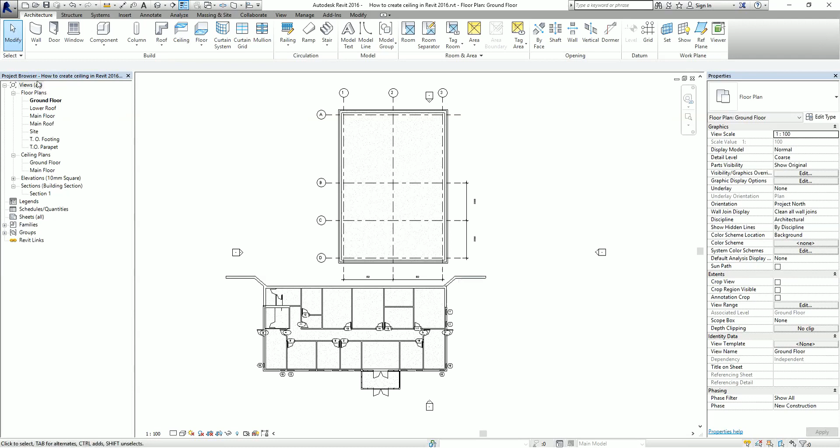So for the first part of the exercise, I'm going to show you how to add a ceiling and modify the ceiling properties. Since we are going to create a ceiling, from the project browser I'm going to change my view to the ceiling plan, because you'll not be able to see the ceiling on your floor plans. That's why I'm going to select the ground floor under my ceiling plans. So I just open this, and this is where I'm going to place my ceiling.

Okay, so to start creating a ceiling, from the architecture tab, build panel, you will see here ceiling. It creates a ceiling at a specified distance above the level in which it resides. So I select the ceiling here, and then you will see the modify place ceiling contextual tab.

So we have two ways of creating a ceiling in Revit. It can be automatic ceiling, wherein it creates a ceiling at a specified distance above the level in which it resides. The other one is sketch ceiling, which I'm going to do later on. So for the first part, I'm going to use automatic ceiling, and I'm just going to make sure that I'm using the default ceiling here, the GWB on Metal Stud.

And then on my properties, let's say for example, I'm going to change the height offset from level to 2400, 2400 from the ground floor. So that will be the height of my ceiling.

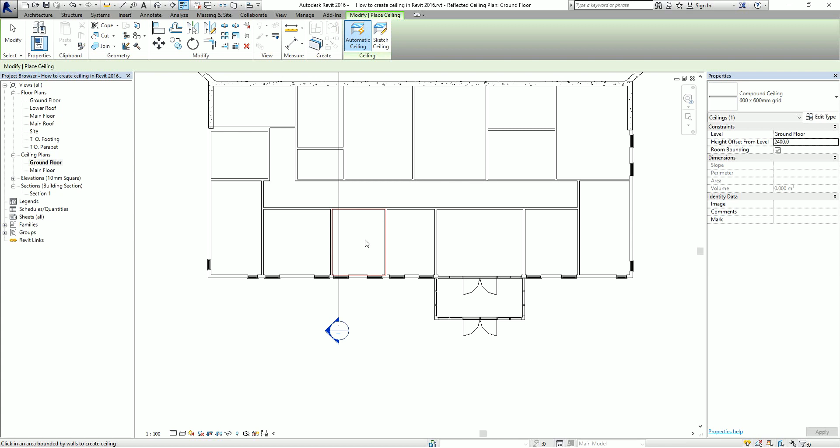The first ceiling that I created is not visible in our current view because the type does not have a surface pattern. So this time, I'm using the 600 by 600 mm grid ceiling, and I'm going to place it here. I'm not going to place ceilings on all of this floor, so I just select part. You just need to get the idea of how to create the ceiling. So I'm going to pick here. There you go, there's the ceiling. And then I select modify.

Okay, so you can easily select now the grid for you to be able to select the ceiling. As you can see, even though I selected the grid, still I selected the ceiling. And in case you want to modify the shape of your ceiling, just like your floor, you can just select your ceiling and then you will see your edit boundary.

In case you want to edit the boundary of your ceiling, you can just recreate it. Okay, you can click that, you can drag up to here, so it's up to you. Okay, but for this one, I'm just going to cancel this. Yes. All right, so that's my ceiling.

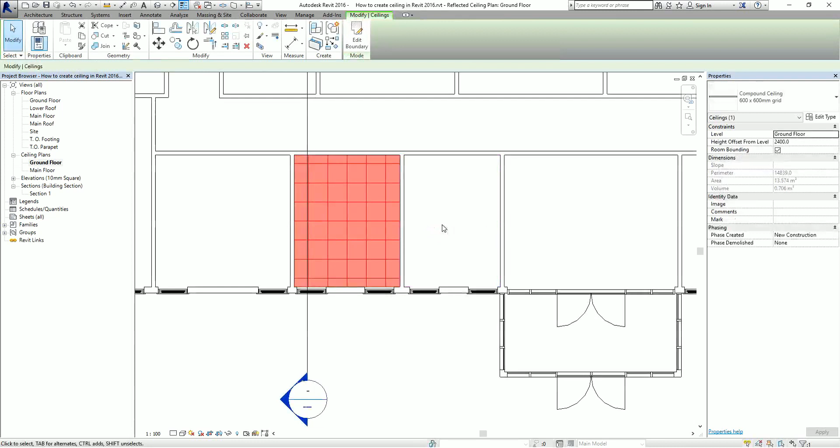So another thing is that you can modify the grid of your ceiling. Okay, so you can edit the ceiling grids. Like for example, if you want to start the 600 by 600 here, I can use the align command here from the modify tab. So I'm going to select the align tool. Excuse me. Okay, so align.

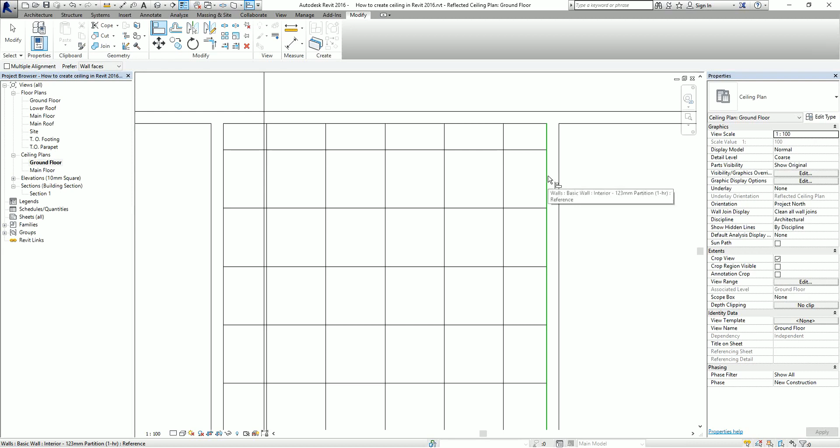All right, then I'm going to select the vertical part of this wall here. And then I'm going to select the grid that I want to align there. There you go. And after that, I select this. And then I'm going to click this. All right. So there's your 600 by 600. So you can edit your ceiling grids.

So aside from using the align tool, you can also use the move command in editing your ceiling grid. I'm going to terminate the tool. Okay, I'm going to show you. So I'm going to select the grid. And then after that, there's the move command. Okay, so I'm going to click this endpoint. And then I'm going to snap at the midpoint. There you go. Click. All right.

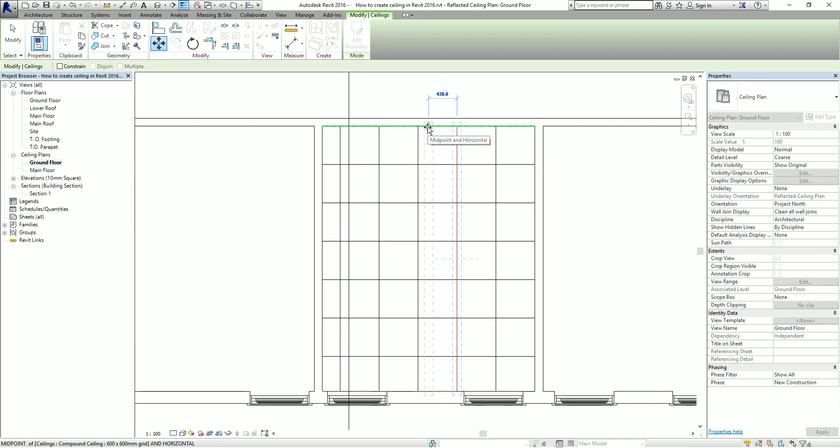So you can use the align command. You can use the move command to edit your ceiling grids. You can also just simply select the grid and then drag it. Okay, you can also do that. So I select and then see, I just drag. Right? I click and I just drag. Click and you can just drag it manually.

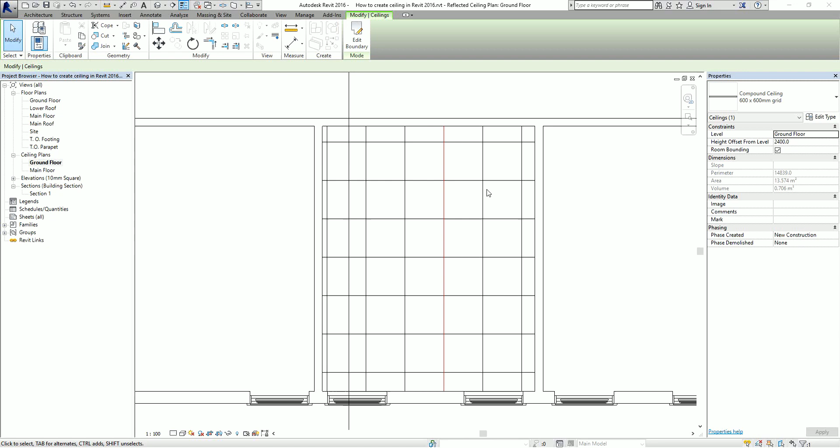Okay, next. What I'm going to do is, I'm going to show you how to sketch your ceiling. Okay, so for the first two ceilings that I created, I used automatic ceiling. Okay, so this time, I'm going to use sketch ceiling. Alright? Okay, so I'm going to create the ceiling here. So again, I'm going to select architecture. And then there's the ceiling. Okay, and then this time, I'm going to select sketch ceiling.

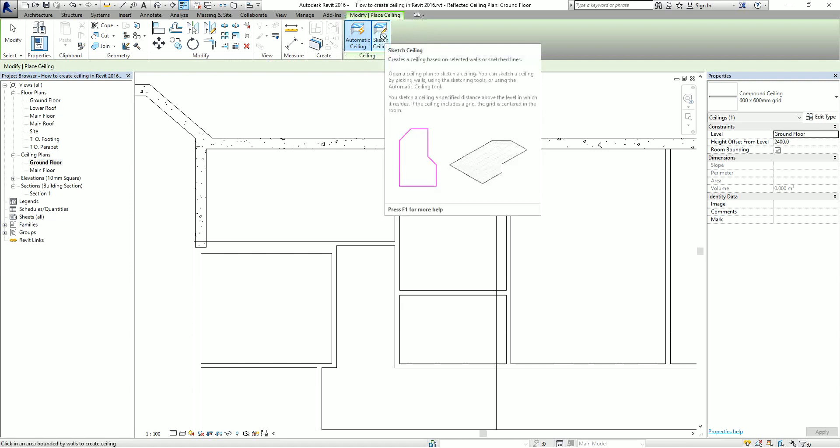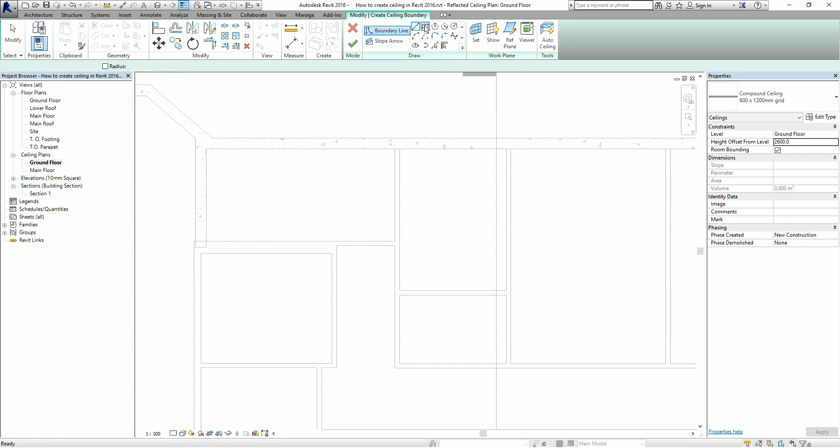Let me change also the type of the ceiling. So let's say I use here 600 by 1200 mm grid. There you go. And then the height offset from level, let's say I want this 2600. Okay, and then from the modify create ceiling boundary, boundary line, so just like your floor tool, you can shape up the ceiling. So since this is just a rectangle, I use here the rectangle tool, and then I click this one, and then I'm going to click this also. There you go.

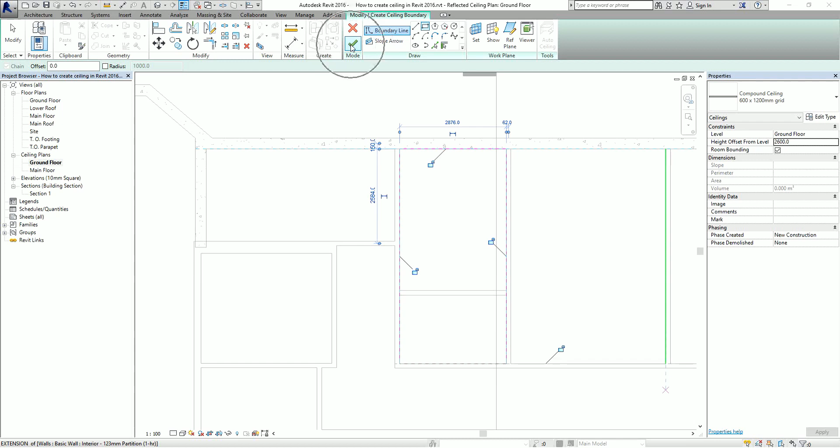Okay, so after I create the boundary of my ceiling, I'm now going to select check to finish it. So check. There you go. So there's my ceiling. And then I'm going to select here modify. Deselect. And then after that, I'm going to place components in my ceiling. So let's say I want to place a component here.

So from the architecture tab, to place a component, there's the place a component tool. So I select place a component. And then from the type selector, let's say I want to place there a lighting fixture. So where are you? It's already loaded here.

Okay, so let's say I use this one. And then I'll just place it. So this family is ceiling hosted. That's why I can easily place it. But if you don't have a ceiling, notice that if you move your pointer to the area that doesn't have a ceiling, it looks like this. If I move my pointer back to the place where there's a ceiling, you can place it.

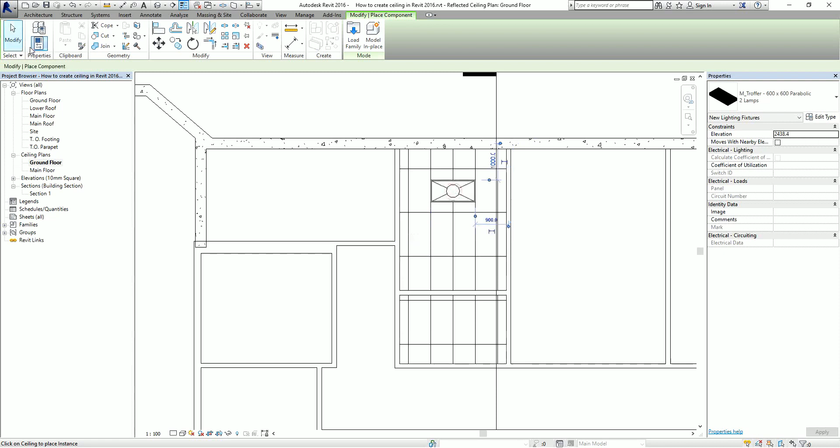So let's say, for example, I'm going to place a ceiling lighting fixture here. So I'm going to place it, and then I select Modify. I'll just rotate this manually, so I can click the lighting fixture, and then you can press space bar. See? As you press space bar, it rotates.

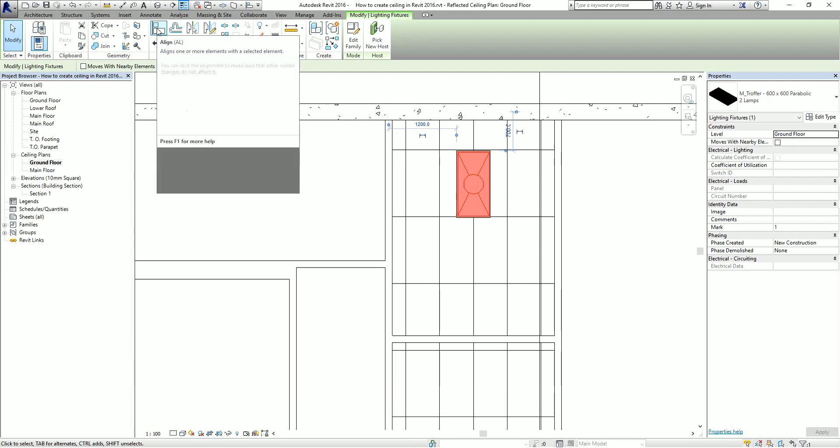And then after that, I just use again the align command or the move command. So I just select align here, and let's say I want to align it here, then I select that edge. Here we go.

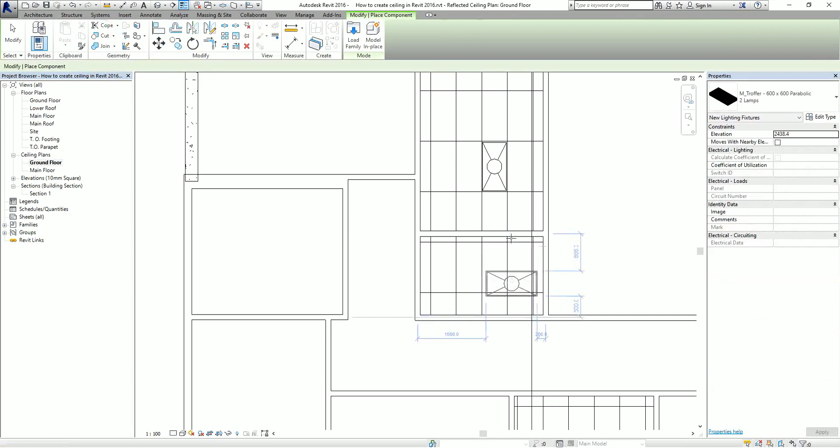And then I'm going to place another component. So component, I place it here. There you go. Modify, select, I press space bar to rotate. And then I just align it again. There you go. Align, align.

So that's how you insert a hosted family or ceiling hosted family to your ceiling. It depends on how you create the family. It can be ceiling hosted, just like this family that I just placed. It can be wall hosted, it can be face hosted, but it's not part of our lesson.

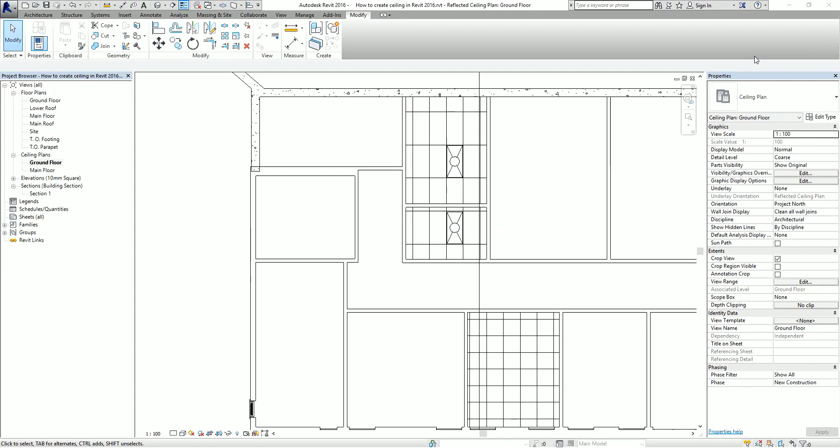So after I place the lighting fixtures or components to my ceiling, I'm going to do some simple modification on my ceiling. I'm going to attach a wall to my ceiling. As you can see, I have this section here, so I'm gonna open the section. Go to view. So this is actually the ceiling that I just created. As you can see, these are the two lighting fixtures here.

So let's say, for example, I do not want this wall to overlap or intersect with my ceiling here. So I'm going to attach the wall to my ceiling. I'm going to select the wall here, and then from the Modify Walls contextual tab, there's the Modify Wall panel. There's this tool called Attach Top/Base. It attaches selected walls to model elements such as roofs and floors.

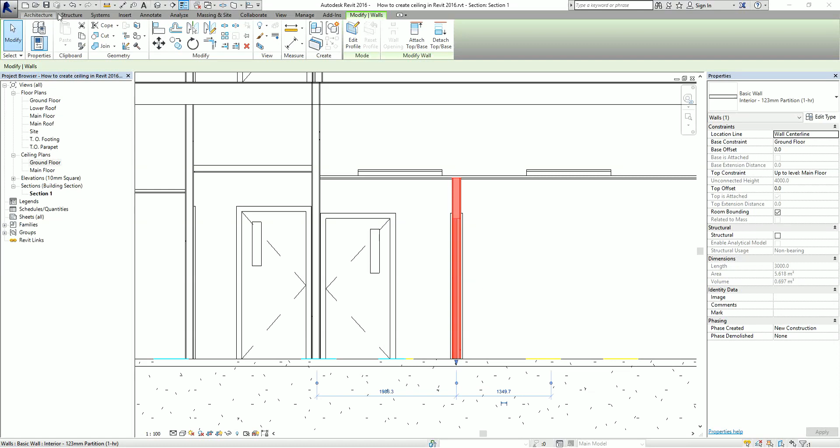So I select this, and then after that, I select the ceiling where I want to attach that wall. There you go. So it's now attached. And then I select Modify to deselect it. So that's how you create your ceiling, and that's how you attach your wall to your ceiling.

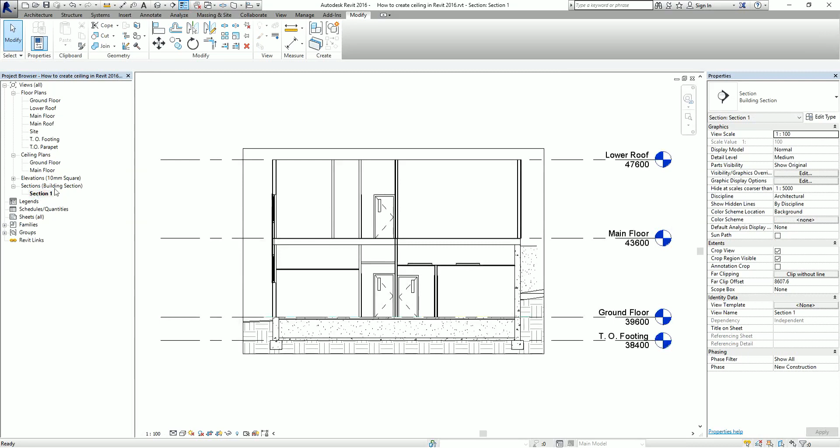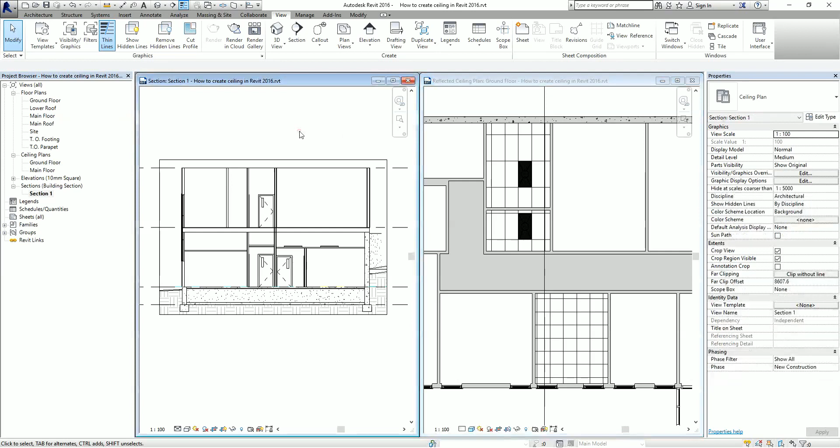So where's my ceiling plan? This is my ceiling plan. So I just close the hidden windows, I open the section, and then from the View tab, I select Tile to show you the finished exercise. I can also type SD, Sierra Delta, to make the view a shaded view. So SD. There you go.

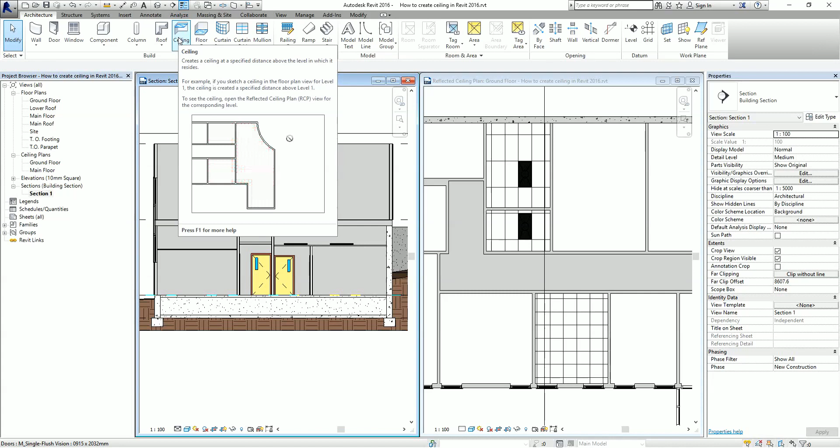So that's how you create your ceiling. Just a recap, the ceiling tool can be found on your Architecture tab. There's the ceiling. You have two ways of creating the ceiling. One is automatic ceiling, the other one is sketch ceiling. Just make sure you are on the ceiling plan if you want to create a ceiling. I hope you learned something from my video.